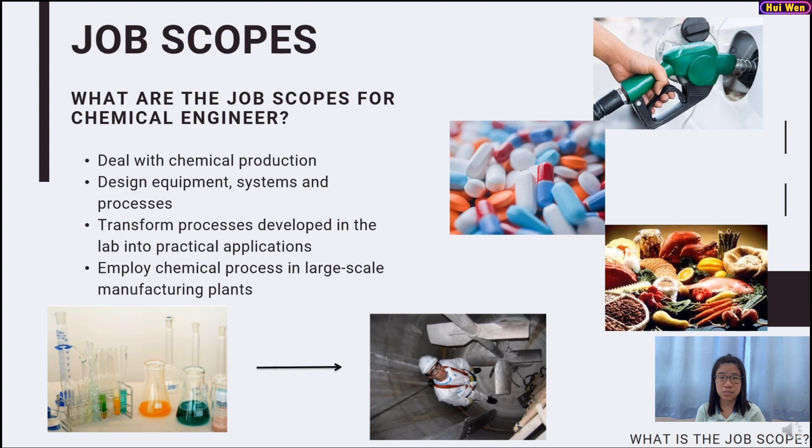Besides, they need to transform processes developed in the lab into practical applications and employed by large-scale manufacturing plants to maximize productivity and product quality while minimizing costs. Many people wonder about the differences of chemist and chemical engineer. Actually, chemists focus on reaction in smaller scale and chemical engineers need to scale it into larger scale.

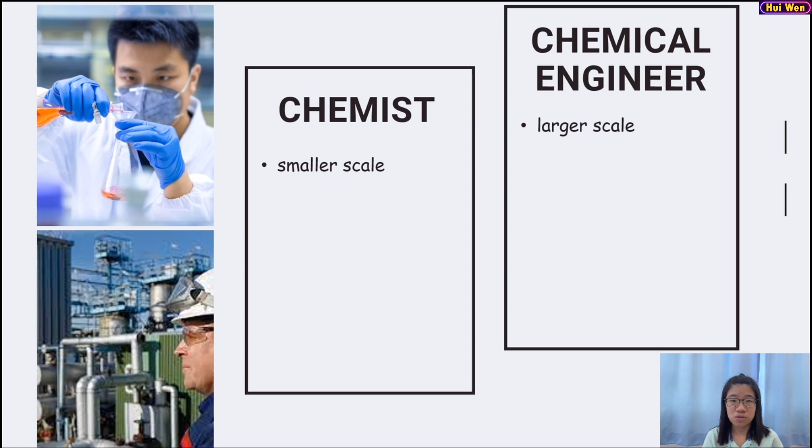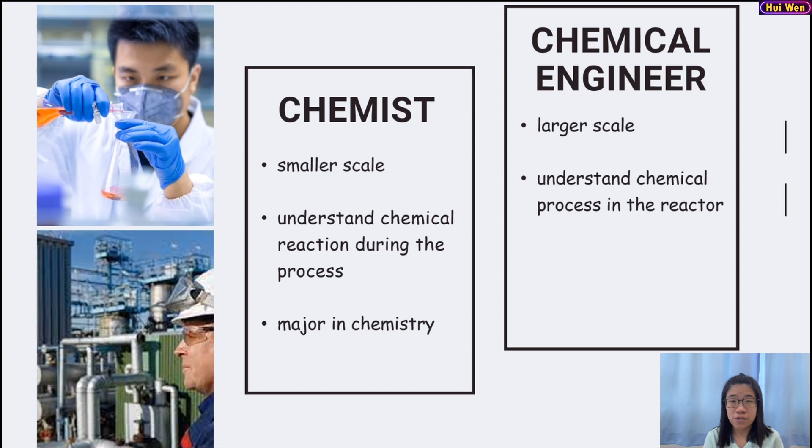Furthermore, chemists understand deeper level of chemical reaction during the process, but chemical engineers need to understand the chemical process going on in the reactor. Last but not least, chemist is majored in chemistry, while chemical engineer is not directly chemistry related. Which fields do chemical engineers work in?

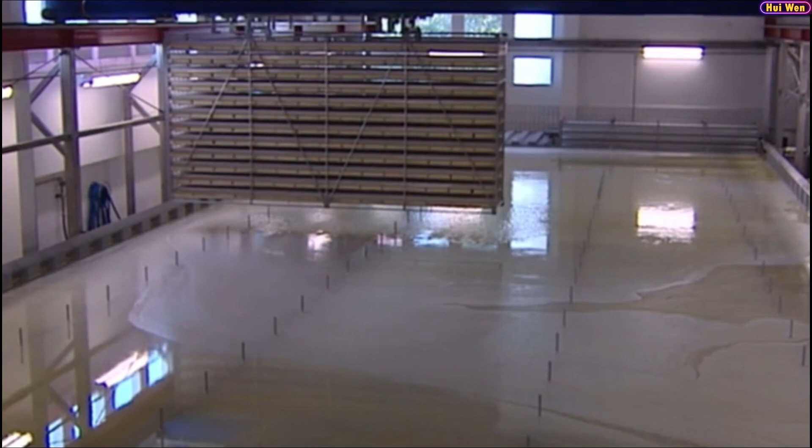They can work in pharmaceutical industry. In mass production of medicine, chemical engineers are able to optimize pharmaceutical processes so that they are safe, accurate, and effective. Besides, they can work in food production. They invent techniques that enhance the quality and increase the shelf life of the food and come up with the technologies that can protect us against foodborne disease.

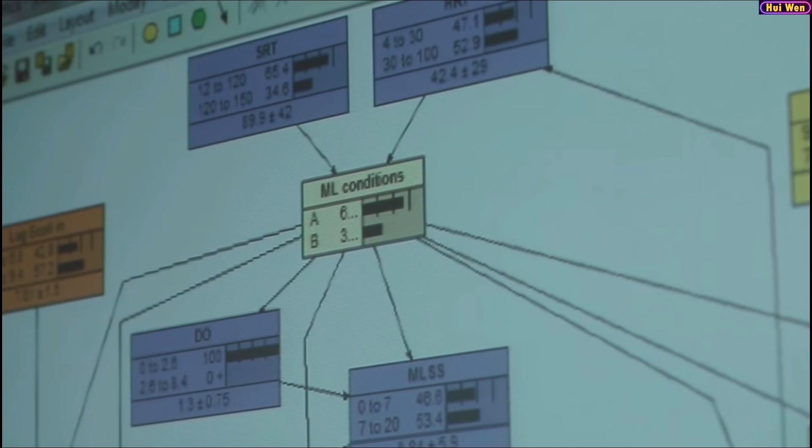Furthermore, they can work in environmental field as well. They develop advanced technologies, monitoring devices, modeling techniques, and operating strategies that reduce the volume and toxicity of pollutants allowed to enter the air, waterways, and soil.

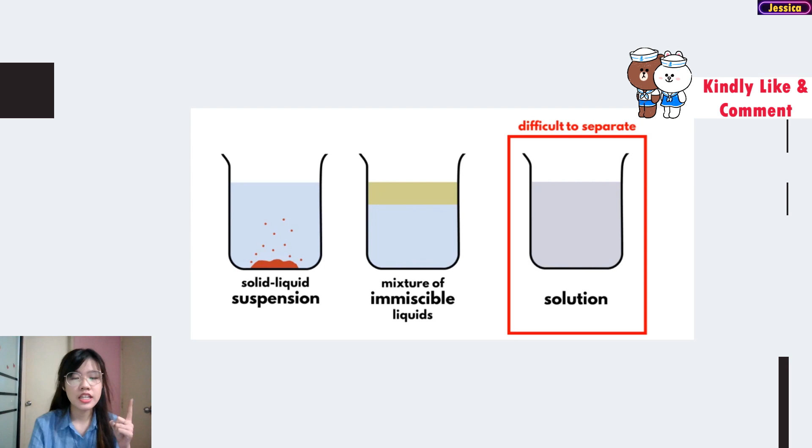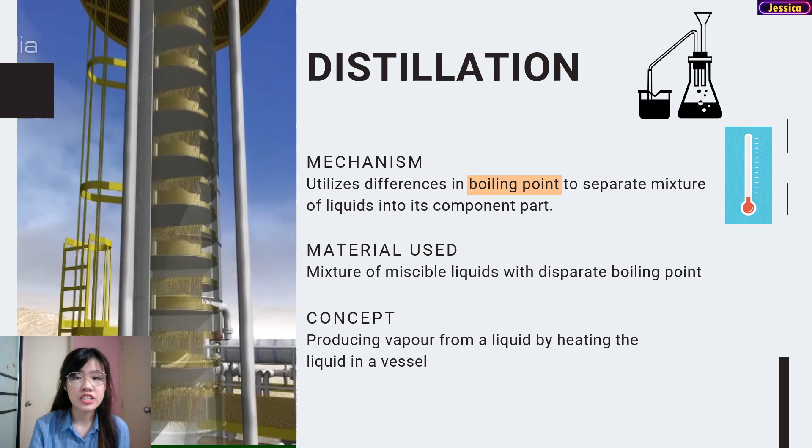There are various types of mixture existing in this world: a solid liquid suspension, a mixture of immiscible liquids, and solution of miscible liquid which are difficult to separate. Thus, distillation process is used. It is a process to separate solution based on different boiling points. The idea of distillation is heating the liquid to force one component which has lower boiling point into the gas phase so that we can collect the vapor and condense it elsewhere. There are several types of distillation, including simple distillation, fractional distillation, steam distillation, and many more.

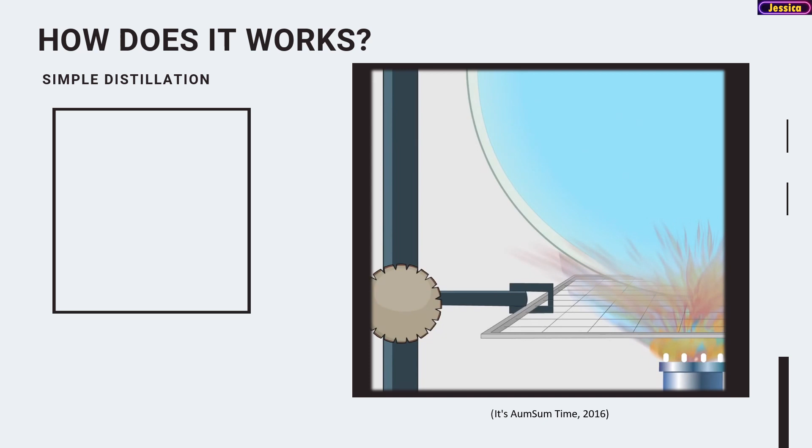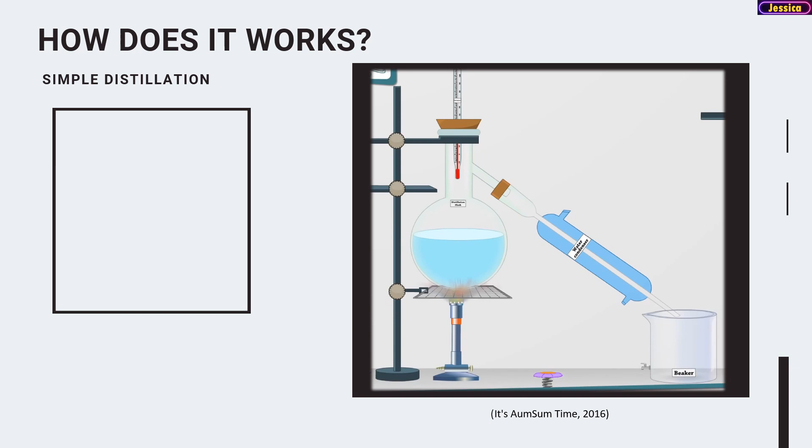In simple distillation, mixture of two miscible liquids is placed in the round bottom flask. Let's take an example of acetone and water. The round bottom flask is sealed at the top to avoid vapor from escaping, and the thermometer is inserted to measure the temperature inside. Since acetone has a lower boiling point, it will be distilled. The mixture is heated until it reaches the acetone boiling point. Then, the acetone starts to vaporize.

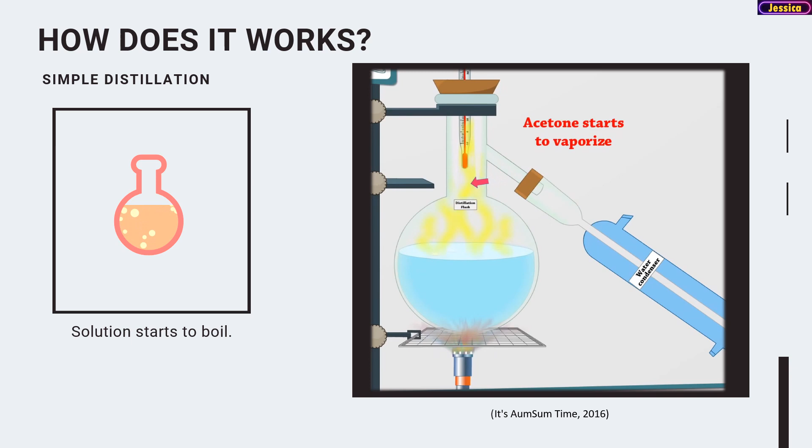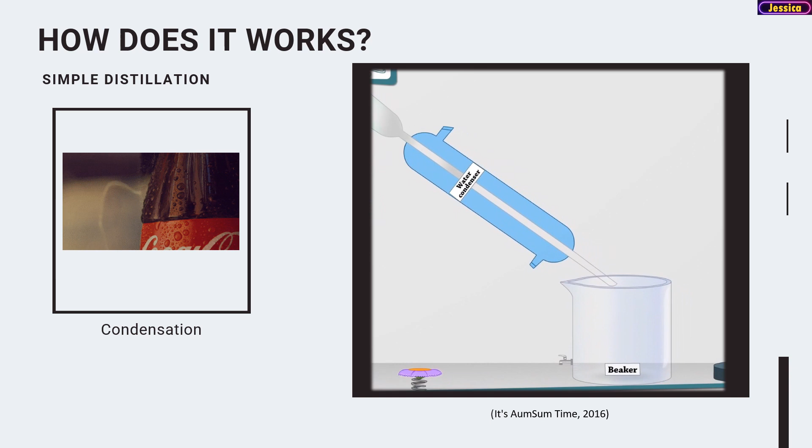The gas rises and passes through the Liebig condenser. The condenser has cold water running through the jacket to keep the temperature cold. The vapors condense and flow through the Liebig condenser. The condensed acetone is called distillate. It's collected in the beaker. When all the acetone vaporizes, water is left in the flask. Thus, separation process is done.

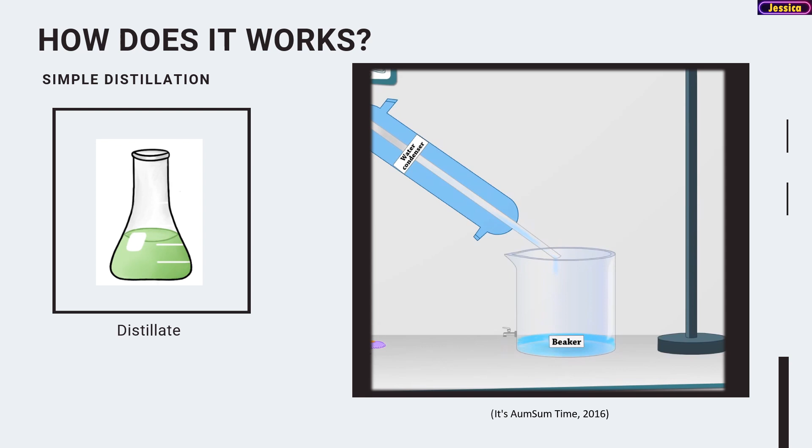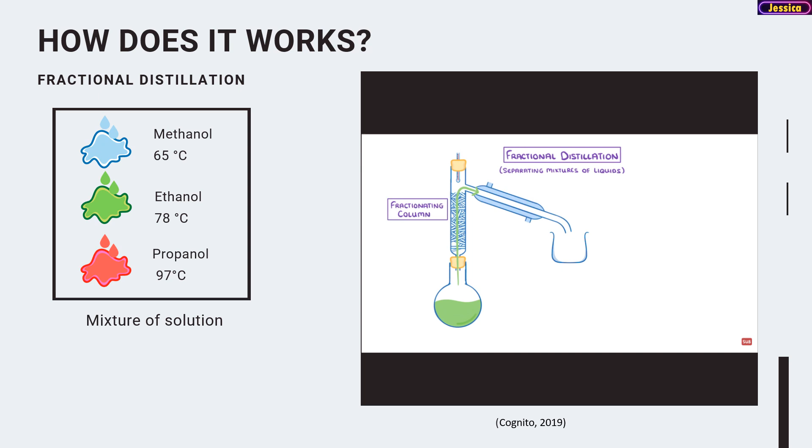What will happen if you use different mixture of liquid with similar boiling point, such as methanol, ethanol, and propanol? When this liquid is heated, more than one of them will evaporate, and so they won't be separated into pure substances. This is where we use the fractional distillation. The vapor of the mixture will now pass through a fractional column before it flows to the Liebig condenser. The fractional column usually contains lots of little glass rods, which increase the surface area, and the top part of the column is cooler than the bottom.

When the solution is heated, methanol will vaporize first, as it has the lowest boiling point among the liquids. It will then pass through the condenser and be distilled. However, sometimes ethanol and propanol would also be evaporated, but as they rise through the fractionating column and come in contact with the glass rods, which are much cooler than the boiling point, they condense back into liquid and fall back to the flask. Thus, the distillate will be only pure methanol.

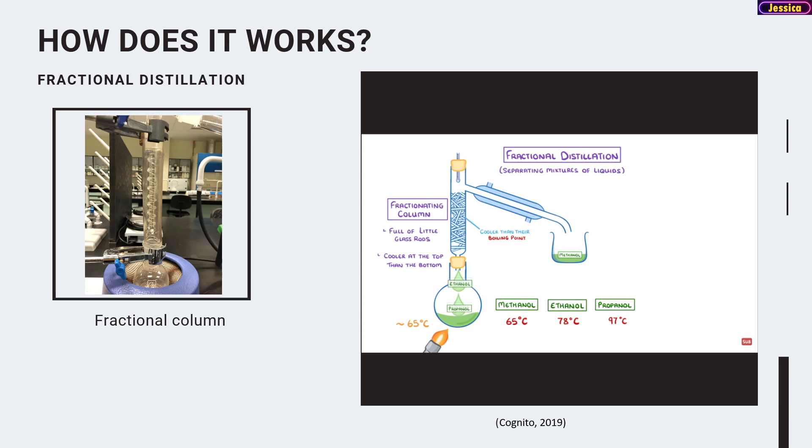The difference between the two types of distillation is that simple distillation can separate miscible liquids with at least a 50 degrees Celsius gap, while in fractional distillation, similar boiling points can be separated. Now, we will look at the applications of distillation. Distillation has many applications, and these applications are used in most areas of bioengineering.

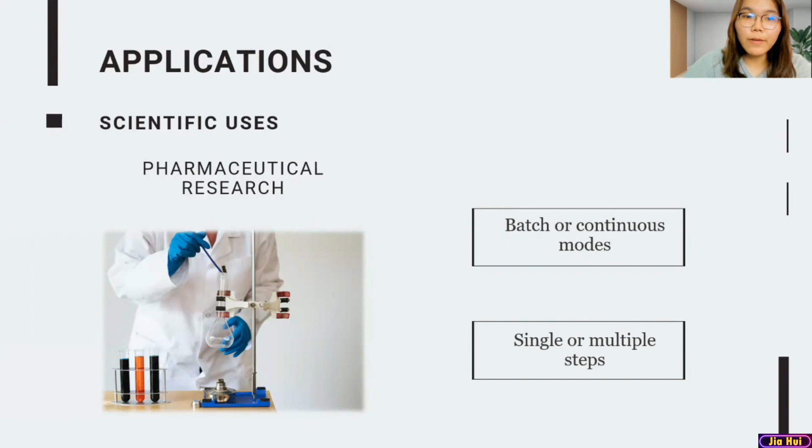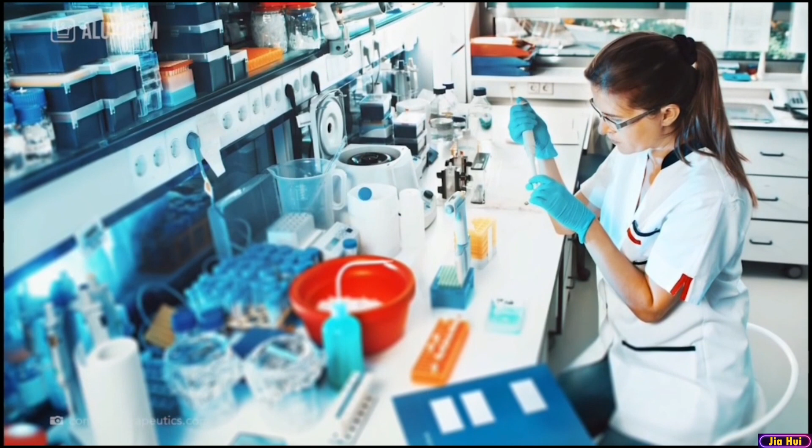Firstly, we will discuss the application of distillation in scientific use. In pharmaceutical research, distillation can be operated in batch or continuous mode in single or multiple steps and can be run for a variety of objectives. Fractional distillation is used in pharmacy for a variety of purposes, including the separation of alkenes, the production of pharma-grade alcoholic solutions, and even the breakdown of cannabis for its oil.

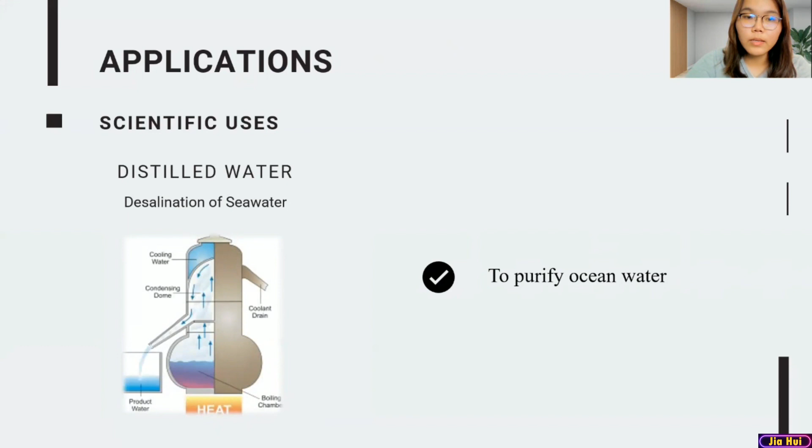Next, distilled water can be obtained by distillation. Distillation is one of the methods to purify ocean water and works well since salt, microorganisms, and other components of seawater are non-volatile. Seawater desalination is sometimes used to provide the country with drinkable water.

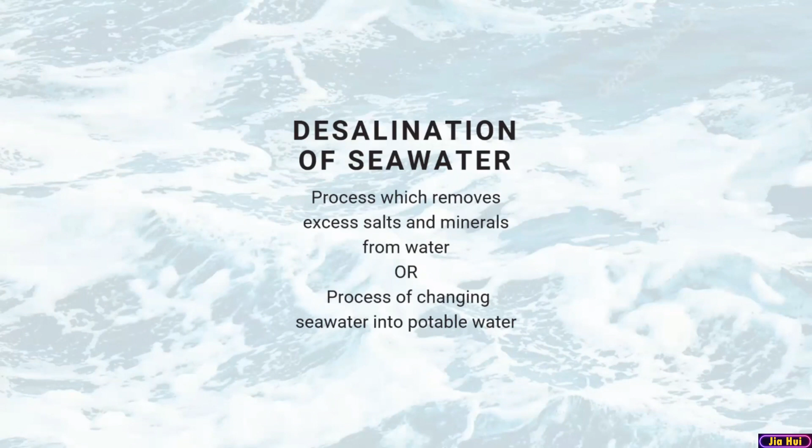Desalination of seawater is a process which removes excess salt and minerals from water, or the process of changing seawater into potable water. There are 4 types of seawater desalination, which are multi-stage flash, vapor compression, multiple effect, and membrane distillation.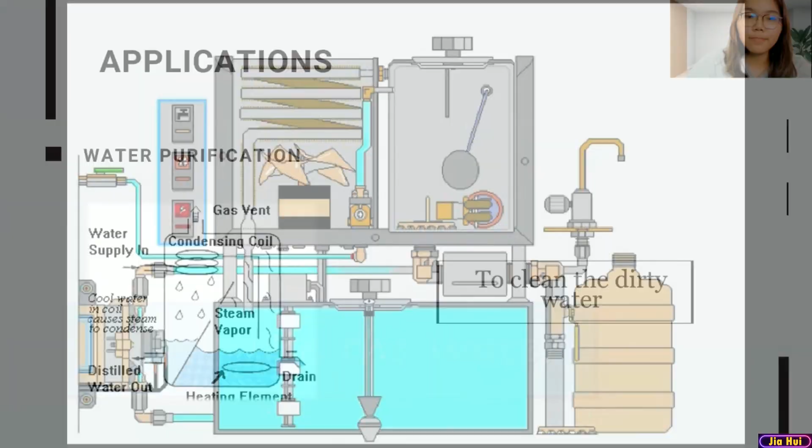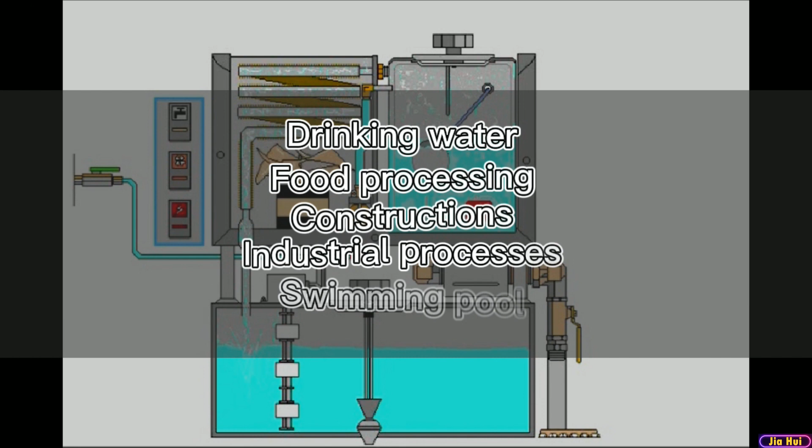Water purification is a process that aims to clean dirty water that includes solid and dissolved materials, and distillation helps us to do the process. Scientists discovered an ideal water purification system that removes both types of the unwanted substance from the water. The cleaned water can be used for supplying drinking water, food processing, construction, industrial processes, swimming pools, and other water-based utilities.

The next application is crude oil refining. Crude oil contains a variety of hydrocarbons that have different boiling points. Firstly, to separate these compounds, the oil is sent to a boiler to be heated into a super hot mixture of liquid and vapor. Then the mixture is fed into a distillation tower where the compounds with a lower boiling point rise up as vapors and the compounds with a higher boiling point fall downwards as liquid. The distilled products are piped off, which include petrol, diesel, asphalt, and many more.

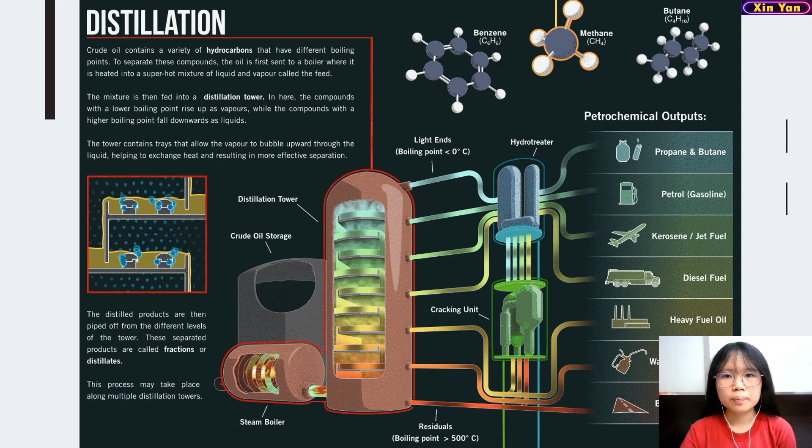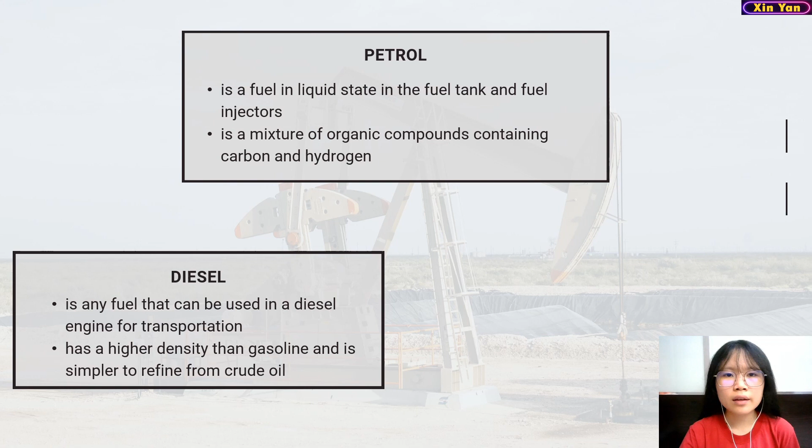Petrol is a fuel in liquid state in the fuel tank and fuel injectors. It is a mixture of organic compounds containing carbon and hydrogen. Diesel is any fuel that can be used in a diesel engine for transportation. It has a higher density than gasoline and is simpler to refine from crude oil. Asphalt is commonly used to make roads. It is a colloid of asphaltenes and maltenes that is separated from other components of crude oil by fractional distillation.

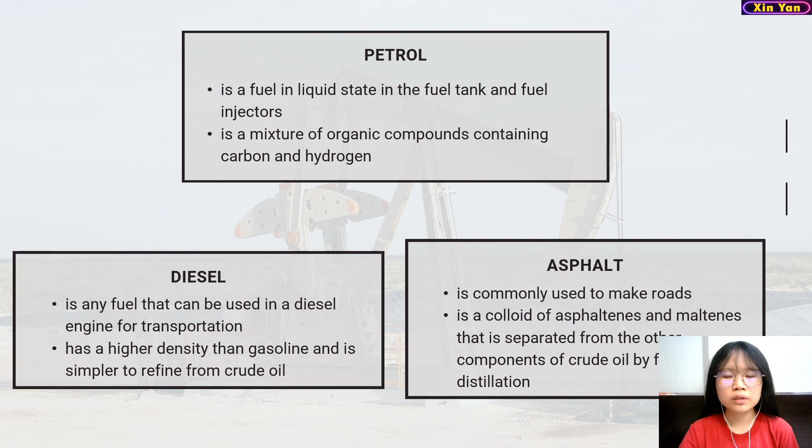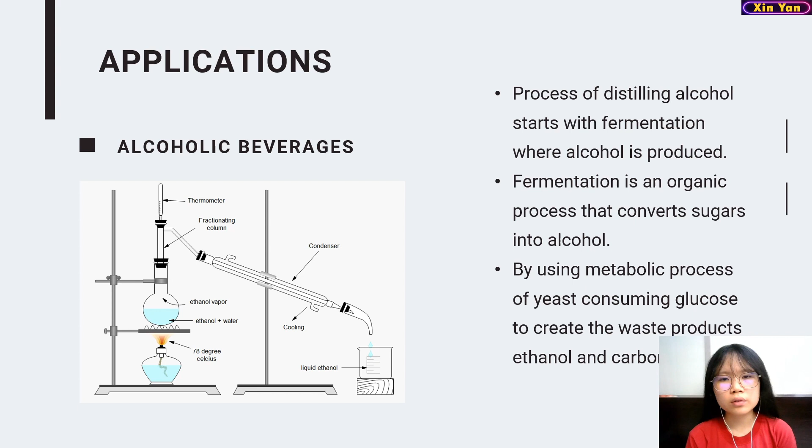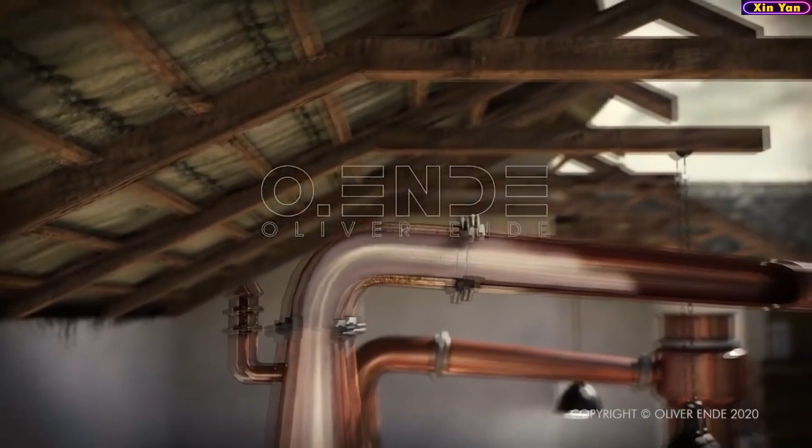Besides, alcoholic beverages are also one of the applications, where the process of distilling alcohol starts with fermentation to produce alcohol. Fermentation is an organic process that converts sugars into alcohol by the metabolic process of yeast consuming glucose to create the waste products ethanol and carbon dioxide. Alcoholic vapors rise in the neck of the wash still due to their lower boiling point than water, while the water is left in the wash still. In the shell and tube heat exchanger, alcohol vapors are cooled and condensed.

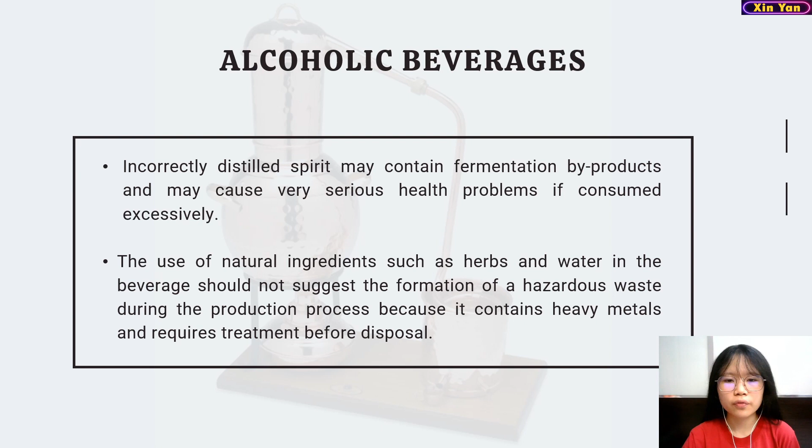The distillation process is repeated in the spirit still. Incorrectly distilled spirit may contain fermentation byproducts and may cause very serious health problems if consumed excessively. The use of natural ingredients such as herbs and water in a beverage should not suggest the formation of a hazardous waste during the production process because it contains heavy metals and requires treatment before disposal. That's all about distillation.